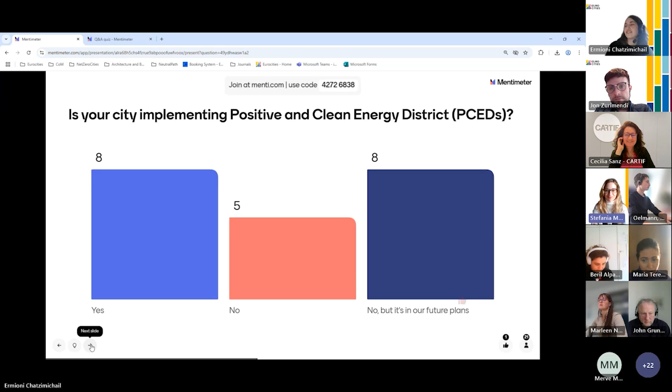And then the next question is, from your perspective, what could be the main challenge of implementing a positive and clean energy district? We know there are many, so just pick one. Yes, funding is a big one. Bureaucracy as well, energy flexibility, climate impact. Quite a few. We will need a follow-up webinar to address all of them, but hopefully we will address some of them today.

Okay, and then the last question for now is, from your perspective, again, what is the main benefit of implementing a positive and clean energy district? Resilience, climate goals, livable lives. Zero emissions, electric vehicles. Local control, yeah, a big one.

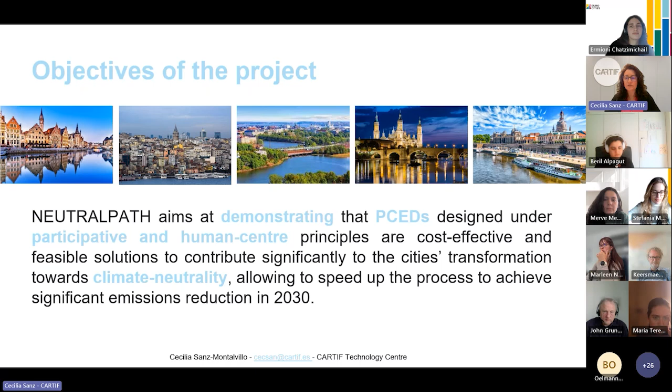We are 25 partners from different countries. These countries obviously are focused on the cities that work in our project. We have two lighthouse cities, Dresden in Germany and Zaragoza in Spain, that implement the interventions in their districts. And we have three fellow cities that work with them, learn with them, and also work on climate neutrality in their own cities: Ghent in Belgium, Istanbul in Turkey, and Vantaa in Finland.

So with this group of partners, we are implementing Neutralpath. We are in the middle of the execution of the project, which started at the beginning of 2023. Apart from the implementation in the cities, with these positive and clean energy districts that help us to understand how different solutions converge into only one,

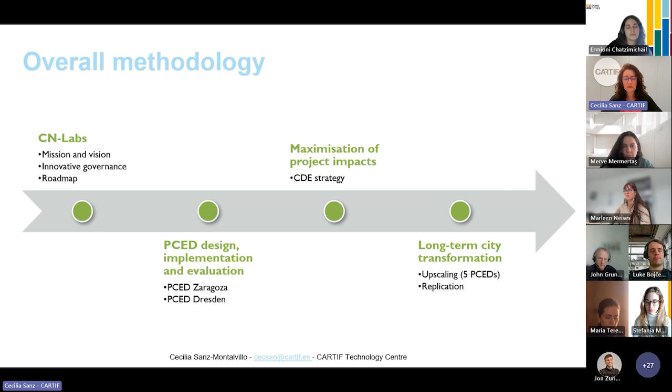we are working on the long-term planning of the cities. We think to transform our cities, and this work is being done with the 5 of our cities. We will measure the impact of these implementations, and also we work closely with the citizens through our climate neutral labs. In these climate neutral labs, we involve all the stakeholders that could be involved in this positive and clean energy district, not only the citizens, also other companies around the city that will help to implement this in the future, working with neutrality in all of our cities.

But before working on it, for those that maybe don't know what a positive and clean energy district is, we have to think of the districts of our cities that implement clean solutions such as energy retrofitting of our buildings, implementing different renewable energy sources there, and sharing the energy between different buildings and storing this energy. We try to reduce the annual demand of this district, being able to provide a surplus.

The intention of all of these solutions is to produce more energy than the district needs. And what we can do with this energy, we can share with other buildings close to the district, or we can put it in the grid for other parts of the city. So with these districts that will be able to produce energy for the rest of the city, we want to help achieve the climate neutrality of the whole city.

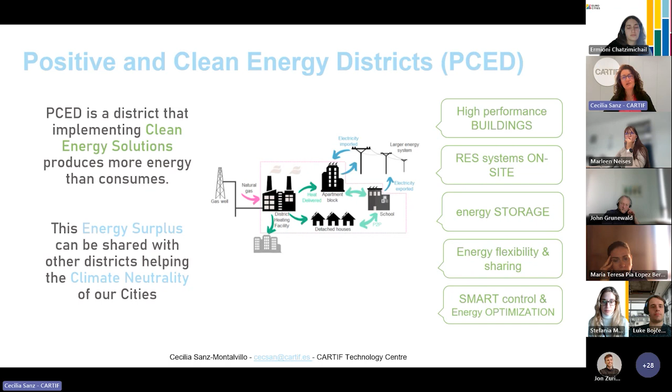So this is the main objective of the positive and clean energy districts, and in fact, the demonstration in this project. We are doing this demonstration in Zaragoza and in Dresden. We have two different configurations of the positive and clean energy district. In Zaragoza, we have a geographical district, all concentrated in the same one. We have public buildings, tertiary buildings, and also residential buildings. This joint of different users allows us to share the energy consumption profiles, and according to the supply and demand, we can produce more energy.

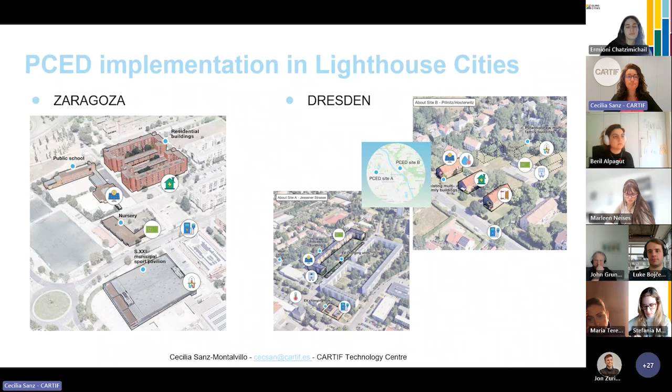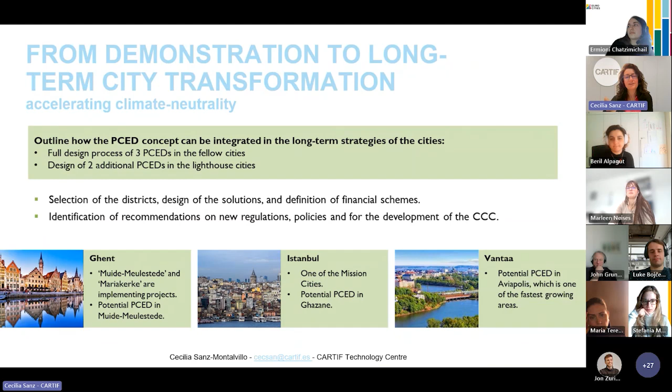In Dresden, which will be explained later by my colleagues from the municipality, we have two parts of the district. We have a virtual path, and there the two parts of the city complement each other and produce energy jointly. Apart from these two cities, we are working very closely with the three fellow cities, which are very active in climate neutrality, and are designing the future positive and clean energy district that could be implemented by them later.

And with all of these considerations and learnings, of course, with the type of project we have, it's important not only that we learn, it's important to provide this knowledge to the rest of the community, to the rest of the cities that could be interested in implementing it in the future, and share the experiences that have been learned here with others. So this is maybe one of the aspects that I'm treating today with this webinar.

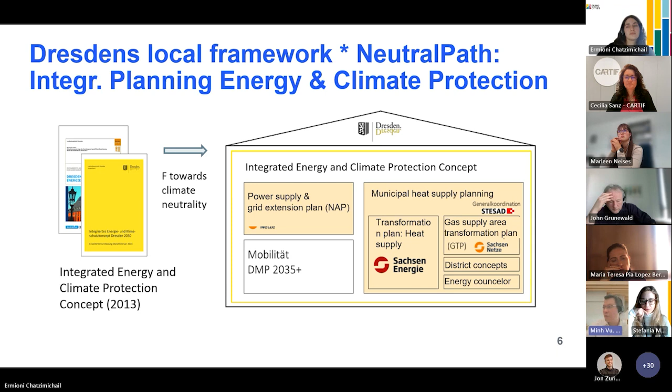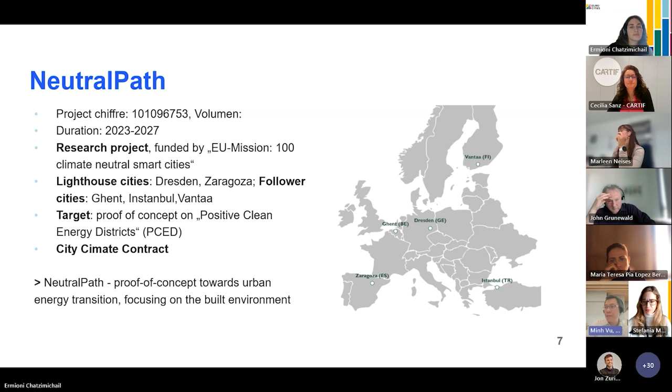And in Dresden, when you look at the next slide, you can see we have 5 work packages here that are oriented towards the main ideas of this mission, which is to have the local citizens involved there and other stakeholders. Therefore 5 climate neutrality labs have been set up in the 5 cities involved here. We want to develop and define innovative governance strategies surrounding that, but also having a co-design approach towards setting up this kind of climate neutral energy district, what we call positive clean energy district.

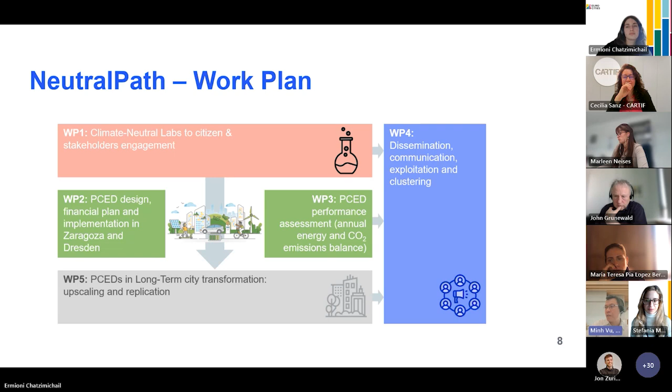And then we want to monitor and assess the performance of this district, as well as disseminate what we are doing right now, our results, as well as developing a long-term perspective for the city transformation. And I think this is one of the main challenges here, to have a long-term perspective developing from these demos.

So in the end, we want to demonstrate that PCEDs are designed under participative and human-centered principles. There should be cost-effective and feasible solutions to contribute to the city's transformation towards climate neutrality, and this should be the basis to approach climate neutrality by 2030.

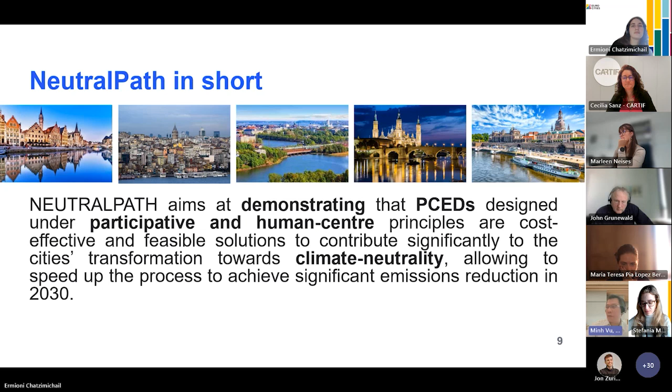Please now go to the next slide, where you can see the demo sites I want to briefly present. At the start we had 2 sites. One is Vonovia, as you can see here, which was called Site A. Then we have Site B, and now we have Site C.

On Site A, we try to, it is a collaboration between SachsenEnergie, Vonovia, and the university, where we develop a more efficient and low temperature level heat supply grid, meaning that we can reduce the energy demand of the grid and contribute therefore to a lower carbon footprint.

And on Site B, it is not connected. There are old houses, one family, maybe multi-family houses, and there we want to have a decentral supply. But here we have now put it on hold because we can't finance the construction expenses of that.

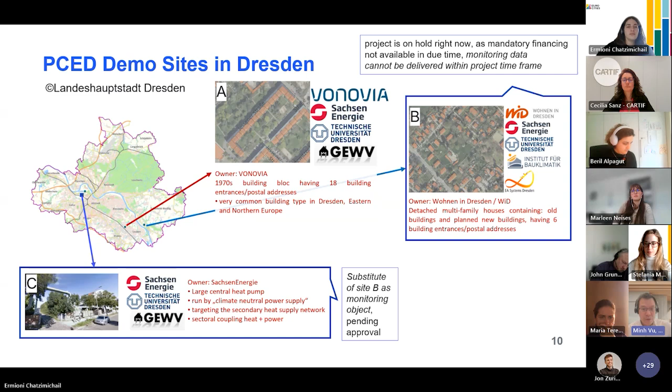But now we think that we can have an energy district, a positive district, when we add Site A and Site C, because the energy output here can generate a higher export than an import. Please go to the next slide.

Maybe to have a short presentation of the sites. So you can see here, Site A is a large building, a residential block from the 70s, and more or less it needs a modernization, and we have seized the chance to modernize the energy system as well.

And what we want to do is permanently reduce the district heat supply temperatures there from 95 degrees Celsius to 70 degrees Celsius, having a low exergy system, meaning that the input temperature level should be reduced, and therefore we can have a higher efficient system. The other stuff is also important, but I think the most important is to reduce the district heating supply temperatures, because then we can add renewables into it.

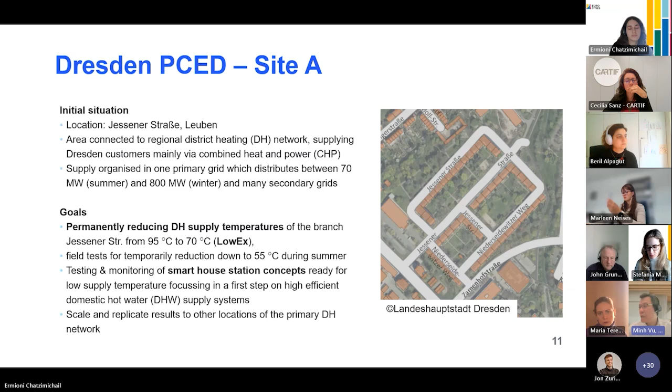So going to Site B on the next slide, you can see here this is more or less a countryside picture, and the buildings are old. This represents a large portion of Dresden's residential areas, and we have to have a decentral energy system, a heat supply system here. We also need retrofitting and also using a lot of ambient temperature technologies like heat pumps, etc., to have a lower carbon footprint.

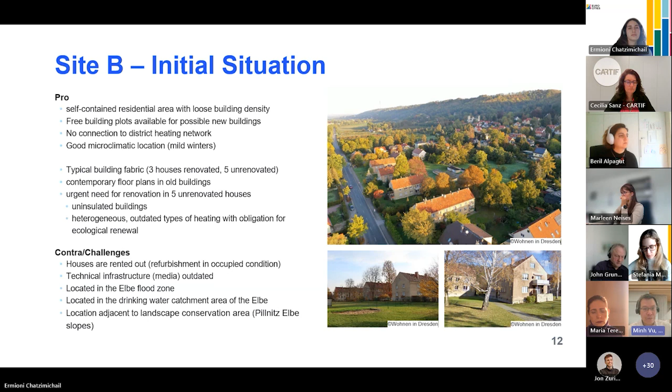And this is something that is more demanding because it's more diverse, and so we need also a more flexible system of financing of those projects. Please go to the next slide.

Here you can see this is our proposal, so it's not approved yet, for Site C. Here you can see it's a large central heat pump that directly feeds its output into the secondary district heating grid there. And also because of this large capacity, we can achieve our positive energy balance. This is something that's ongoing, and we hope that the project controller from the EU can bring forward this solution from our side.

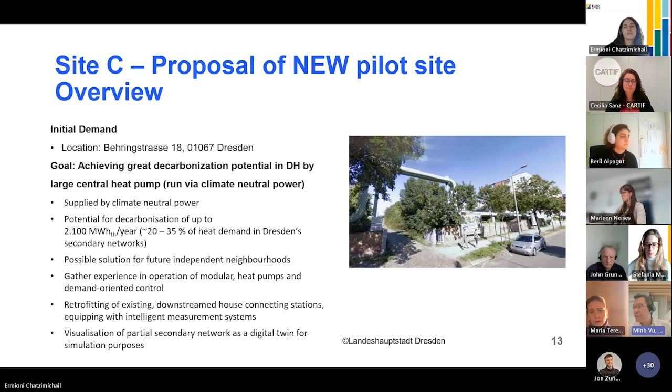So this is a very brief presentation of the sites. Could you please go to the next slide? I have here a very short summary of this. So currently Site A is relatively unchanged, and I think that this kind of low temperature district heating network we can realize there.

Site B we will keep as a dissemination object in the project, because the concept is still viable, but the financing structure is something that has nothing to do with the technical feasibility of the project. And Site C is something that - so if you look at our project, we have 3 sites.

We will summarize, or add, all 3 projects' energy balances into one common balance. And because we don't have one single situation in a city, we have to see what kind of typical solutions we can do on each site. Then we will add all actions into one energy balance. This was the idea from our side.

So right now we add the energy balance of Site A and Site C, whereas Site B is not part of the energy balance for monitoring purposes. But we keep it as a project that should support the discourse in the city on how to move forward with project sites that are not connected to the district heating network. Could you please go to the next slide?

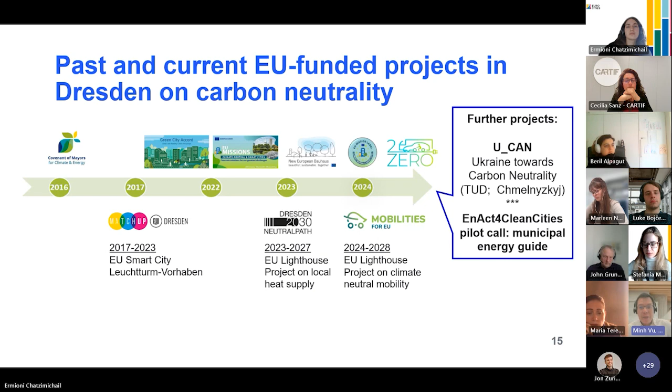Thank you so much, Minh, for the presentation. I know there's already a lot of content shared in these two brief presentations. Hopefully by now our participants have a clearer idea of the Neutralpath project, what it's about, positive and clean energy districts, which cities are involved, which components and sectors we are trying to tackle, and the overall goals of climate neutrality, and how to use positive energy districts as a component for European cities to achieve these climate goals. More specifically, we've heard from Minh the details of how this project contributes to a long-term vision for the cities, and the specific sites of the positive energy district that the city is trying to implement under Neutralpath.

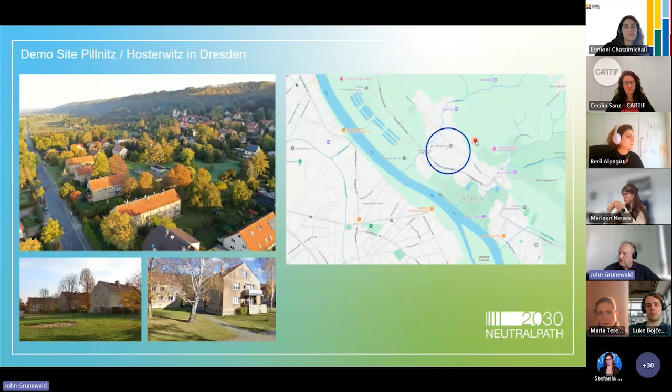So you see here the pictures. We have some free space, and free space square meters of garden give us possibilities to harvest energy. And also the buildings are not very complicated. I think it's quite easy to put some renovation methods forward. We have also the river Elbe, which is very nearby. So we have quite good conditions there, and I think it's an interesting project.

Our targets are, of course, supply of local renewable energy, and also the reduction of emissions, CO2 and biocides. I come to this point later. Then about owners, there should be a renovation of the building without moving the tenants out, which is also relevant to the cost of renovations. And our solutions we propose to renovate buildings are done by available components. So this is not very complicated. It's quite easy to install, but should be very efficient. And this should lead us to energy transition at affordable prices.

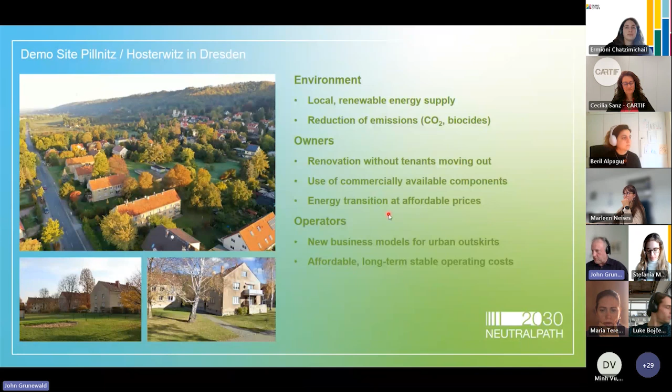At the same time, it should open up new possibilities to develop business models for the energy suppliers, which are specific to this kind of locations. And as Minh Vu already said, this location is kind of typical to Dresden locations. We have 66% of our buildings which are not connected to the district heating network. That means we have situations like this. So it is the majority of buildings in Dresden, and therefore it should be interesting to develop some new business models for energy supply of those locations. And of course, they should be affordable, not too expensive, and there should be a long-term and stable operating cost. This is, in short summary, our targets.

The first thing I like to mention is the method of our work involves digital twins for building performance simulation, which I think is a very important tool to be more accurate in predictions. When we talk about renewable energy, this is not available at every amount. Most of the time it's a limited resource. And when we have to develop plans for using limited resources, we have to be a little bit more accurate in our calculations. This was not the case in the centuries before. In fossil times, we could afford lavishing energy, and I hope this time is over now, and we can come to new planning methodologies and new planning tools which take into account the limitation of our resources.

So that's the reason why we use a building performance simulation to know about the energy demand of the buildings. The first assumption is that we develop geometric models like this, what you see here on top of the screen, so that we have a one-to-one model of the buildings inside our computers, and the building models are able to run simulations on hourly and sub-hourly basis, so that we have a quite accurate physical description of all energy flows and energy processes that go on inside and outside the buildings.

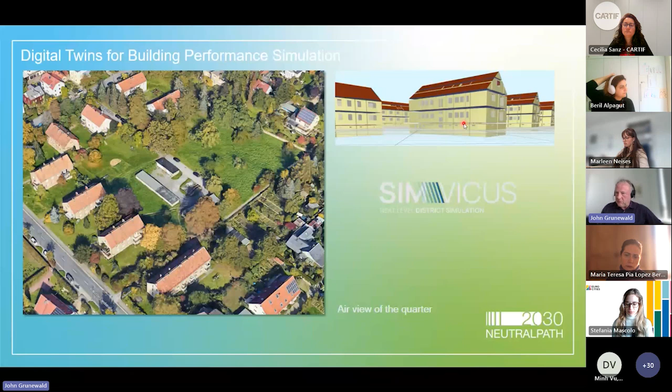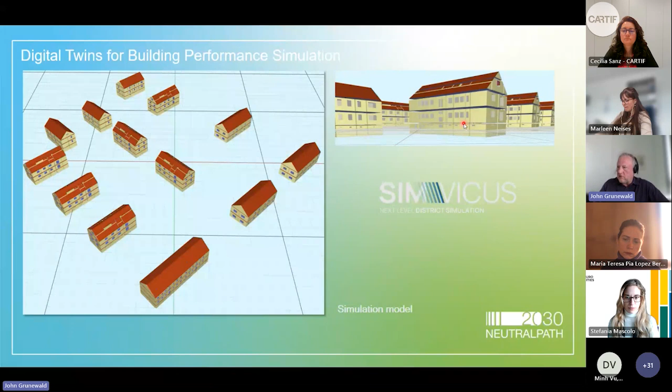So the next step was to take all these technical parameters from the buildings and to develop the digital twins of this quarter, what you see here. And once this is done, you can let it simulate, and you get hundreds of results. For instance, you see here in the top graphic the boundary conditions, temperatures and relative humidities of the location, and then the inside temperatures in the buildings, which are pretty much constant because we have heating in wintertime and maybe some good conditions still in summertime.

Then you see here the radiation loads which are applied to the buildings, and then here some energy balances on a monthly basis, but this is derived from hourly energy balances. And then we know about the predictions of energy demand, and of course we have to compare with the actual energy demand, and we did some monitoring on site and compared simulations and reality.

And then of course there is the first difficulty. Some of these buildings are not used in a usual way. We have some special people in some buildings who use very little energy because they just save energy, which is not normal. But we have to deal with this somehow. We have to calibrate our simulations to some realistic behavior, and therefore the comparison between the real energy demand and the simulation is a good step, but it's not enough. We need to find the right interpretation of this data and a right way to deal with it.

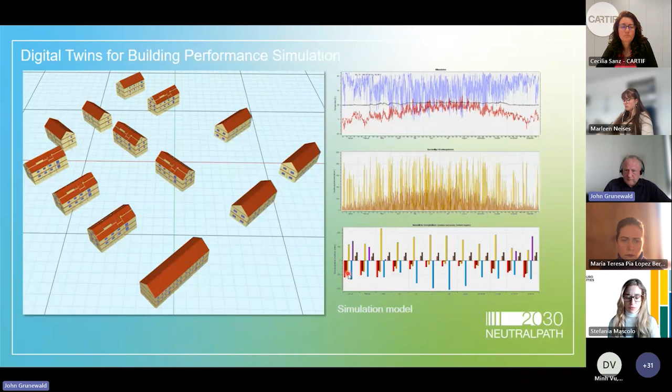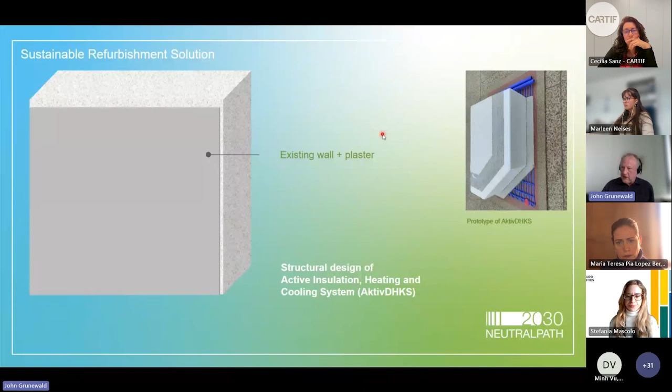So the next step was to develop a sustainable refurbishment solution. And I introduce this solution very briefly. So this is the existing wall with plaster. Fortunately, this is not a heritage protected or listed type of building, so we have the freedom to apply something at the outside of the building. So we come up with a capillary tube system, which is also plastered, so it's installed inside the plaster. And then on top of this, we get a thermal insulation composite system.

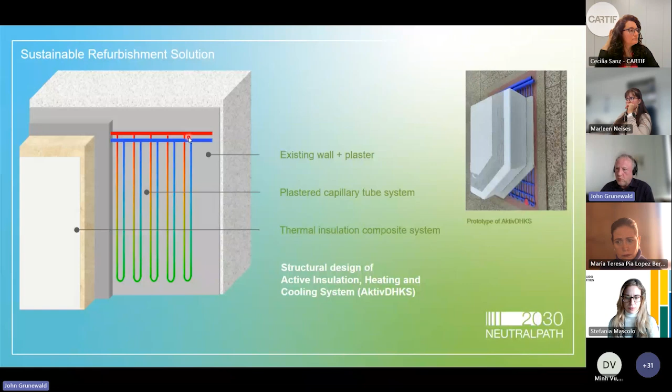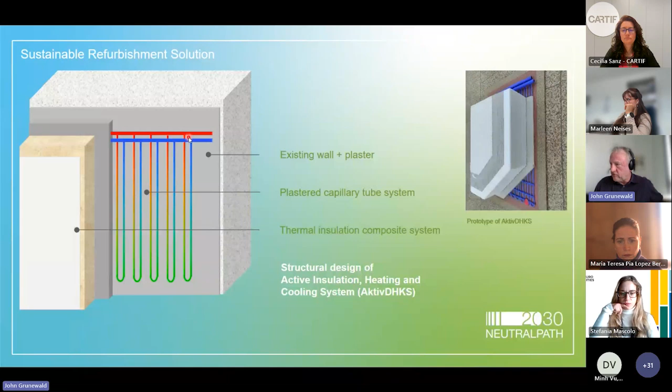And the purpose of this system is to provide a certain temperature at the outside of our wall, which is in wintertime 20 degrees C, and in summertime the same temperature. That means in wintertime we provide some heating of the building from outside. In summertime we provide some cooling. But this is not a full heating load. This is just the base load of heating provided to the building. The peak load is still provided by the radiators, the old heating system, which are installed inside the building. And this is quite interesting. This comes up with some benefits or some advantages.

And the next point is we can activate the building mass, so the building mass becomes a thermal storage. That means we can operate a heat pump even at times when there is no heating demand. We can just store energy and have better flexibility on the electricity side. Of course, we want to have our own electricity production on the roofs, and we want to make use of this electricity as much as possible. And therefore, it's good to have some building mass as a thermal storage.

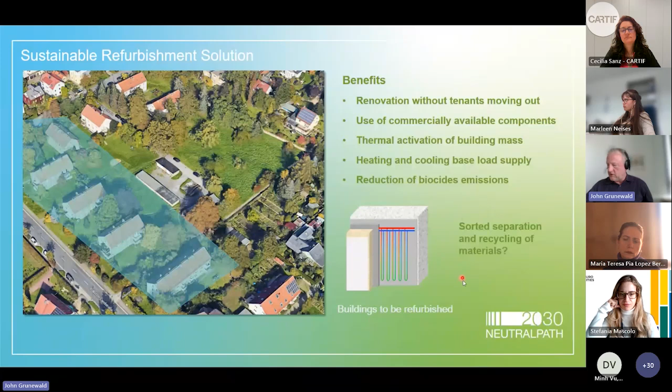So then there is still one question open. How can we separate the materials after the lifetime is over? How can we recycle the materials? We started a new research project on this. So this system is still under development to make it recyclable. And I hope we can come up in maybe 2 or 3 years with a system which can be recycled in a full way, so that we have real sustainable solutions in place.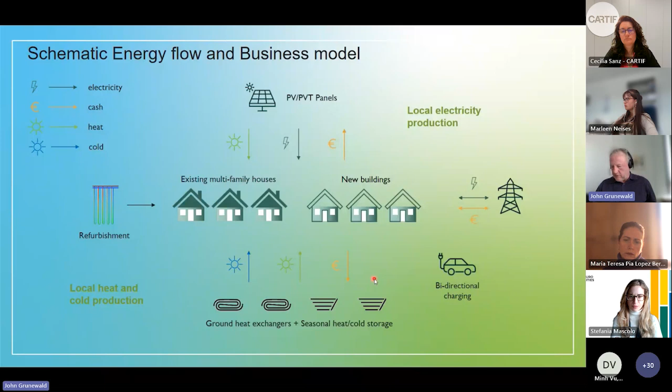And we can also install boreholes. Then we have a vertical installation of ground heat exchangers. And these systems are able to store energy. We can feed in heating energy in summertime and make use of this heating energy in wintertime. So that's a seasonal storage. And vice versa, if we extract heat in wintertime, we build up a cooling potential, and this cooling potential can be taken to summertime and provide some cooling energy in summertime, which is also beneficial.

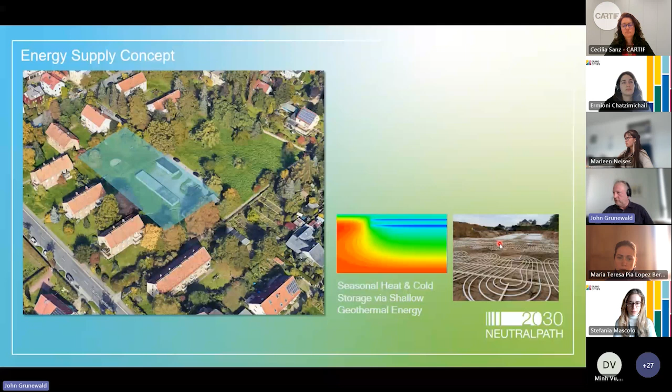You see here the advantages. Of course, this is a full renewable solution. It increases the heat pump efficiency. It provides cooling and storage in one. It's ideal for so-called 5th generation of district heating and cooling networks. This is the newest type of district heating networks. And of course, those networks enable bidirectional energy flows.

And it is space efficient. At least we try to make it space efficient and long-lasting. Those kind of installations should last at least 50 years. And if in place, it can provide energy independence and cost savings, hopefully, and reduce the dependency on external resources.

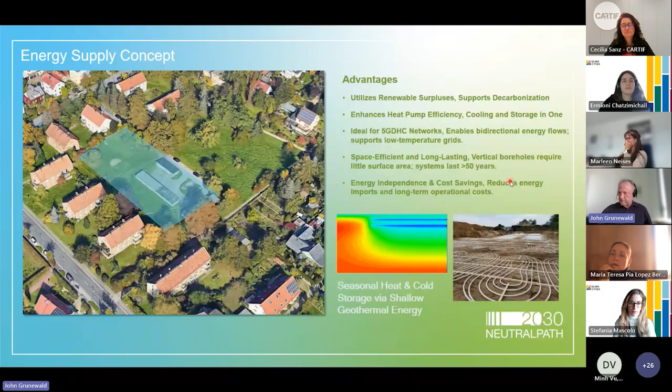You see here a little bit more in detail different types of ground heat exchangers. We call it the first type, which is in the first 10 meters of our ground. This is called the very shallow geothermal energy or ground heat exchangers. Then the shallow geothermal energy is up to 100, maybe 400 meters. And everything that goes deeper than 400 meters is called deep geothermal energy. Deep geothermal energy is not in our interest. In our interest is shallow and very shallow geothermal energy.

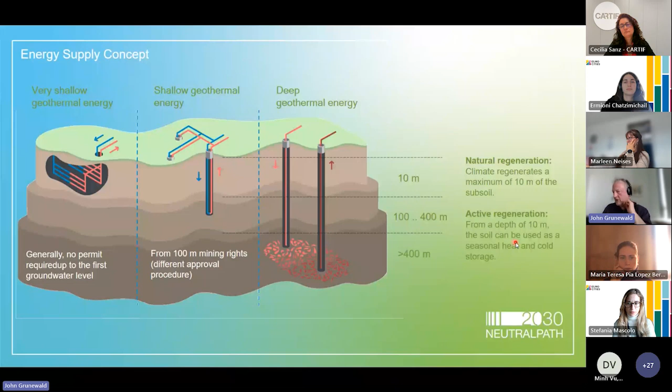And we need to know that the natural regeneration of our ground is possible to a depth of maximum 10 meters. From 10 meters on to maybe 100 meters, there is no natural regeneration from the top of the ground. That means if we get heat from this volume, there is some active regeneration needed. That means we have to feed in heat in summertime to regenerate the ground. Otherwise, we get into problems after a certain couple of years. And this leads us to the seasonal storage of heat and cold.

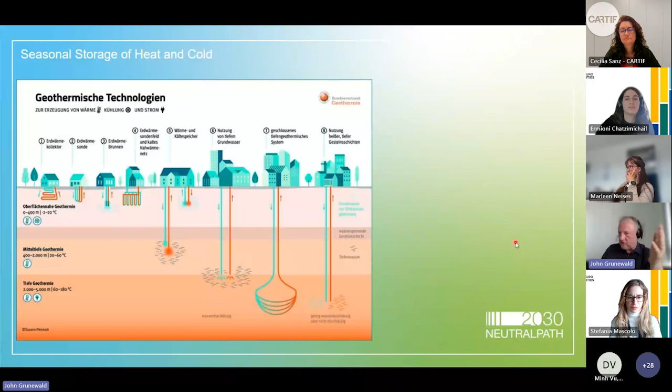So I investigated this topic in detail because this is my favorite research topic right now. And this is something that can be multiplied in different climate zones, but it should be climate zones where we have a heating demand in wintertime and cooling demand in summertime. Then it makes sense to talk about seasonal storage.

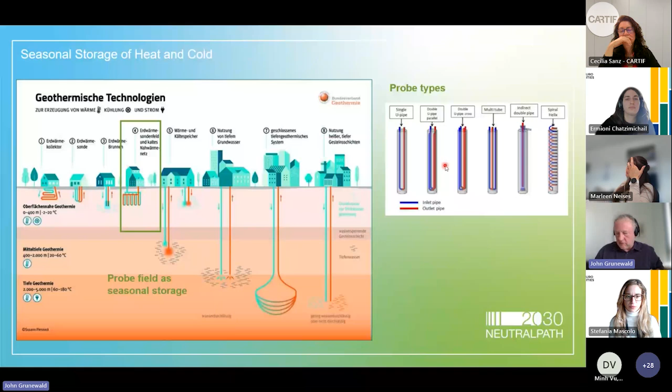And my favorite technology is this kind of probes. You see different types of probes, and those probes are installed most of the time in fields, let's say, in certain distances. It looks like this. You see here a probe field.

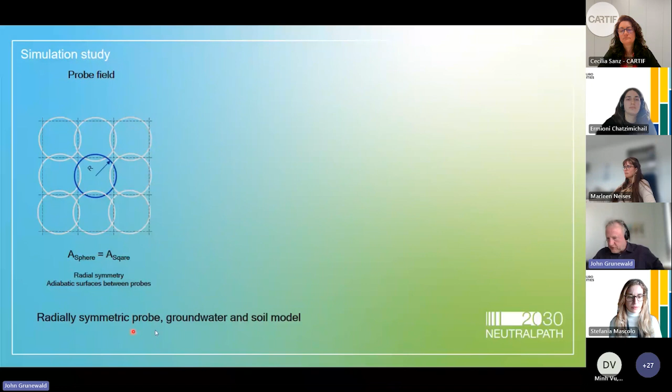I did some systematic simulation of this kind of probes, a simulation study of radially symmetric probes or models, including groundwater and soil models. You see here how it's modeled. There's a rotation axis and there's the heat flow around the probe. I just take out one of the probes from the whole field and put this into a simulation model. And then you see here the simulation model itself.

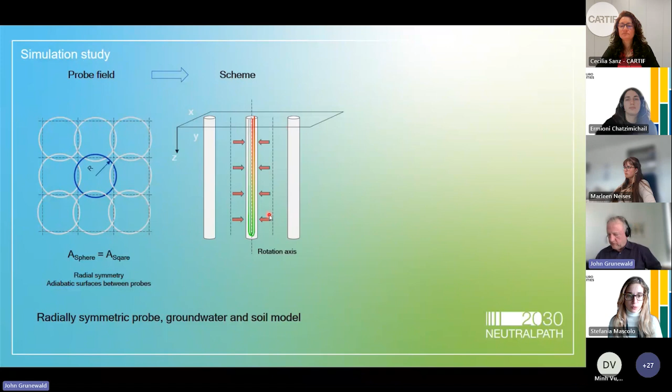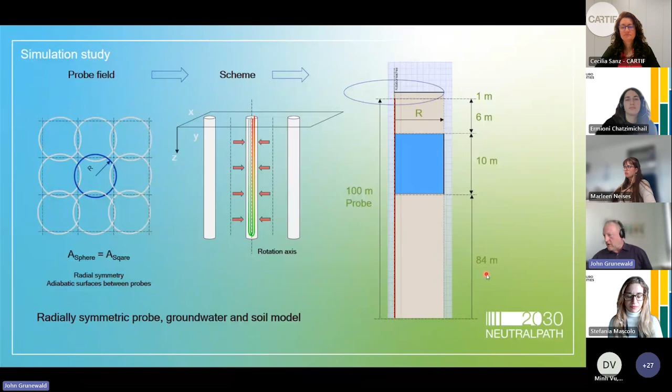We have 7 meters of soil, then 10 meters of groundwater, then 84 meters of underground. In total, the length of this probe is 100 meters. And you see here the model. What we get from the model is the temperature and moisture behavior of the ground in dependence on the extraction and the exchange of energy between the buildings and the ground.

You see here a temperature field at a certain time point. When I analyze my results, I watch this like a movie, because at every hour we get such a picture, and when we follow hour by hour or day by day the development of temperatures and ice contents, we can watch what's going on underground. For instance, here we have some ice content. You see this deep blue. This is already ice formation.

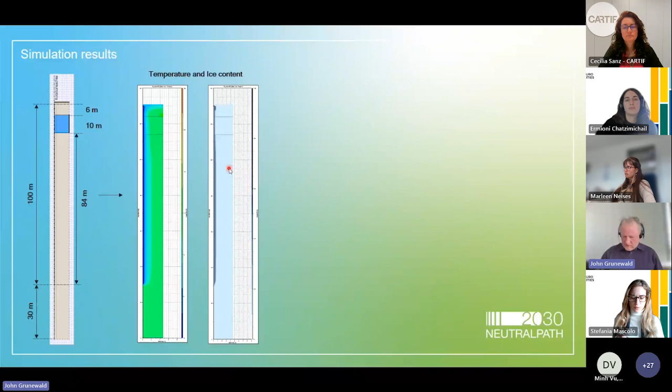This is something new, that we use this also in a way that we have some ice formation. Partly it's not allowed, so we have to discuss with authorities about permission to do this. At least it discovers huge energy potentials, because phase change enthalpy is a huge energy.

And to get more into details, we put some sensors inside this volume. Here in this case, we have temperatures in a 1 meter radius around the probe. The red one is the probe temperature itself, so this is here, this blue area. And then we have the soil temperatures, the groundwater temperatures, and the underground temperature in 1 meter radius. And you see here a natural behavior that happens when you operate such a system.

Of course, in wintertime, we go down to certain temperatures. Here in this case, we have freezing. We go down to -6. In summertime, we go up to about 25 to fully regenerate the ground. Here we have 100% regeneration. That means the same amount of energy that we get in wintertime, we give back in summertime to the ground. So 100% regeneration.

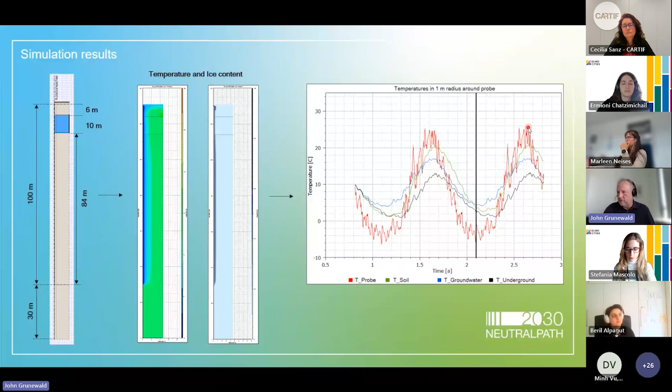This ensures that we arrive at the same point every year, that we have full regeneration and stable operation of the system throughout many years, as long as we want. And I did a systematic investigation of this. The distance of the boreholes was minimum 2.5 meters, maximum 12 meters. Different types of soil: dry, moist, wet. Different energy yields from 3,000 to 30,000 kilowatt hours per year. One probe, and 100% regeneration.

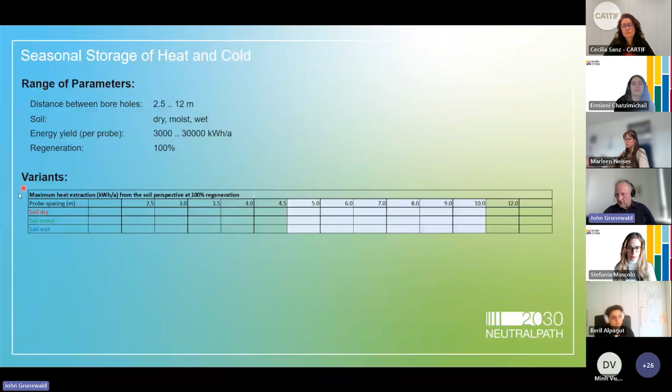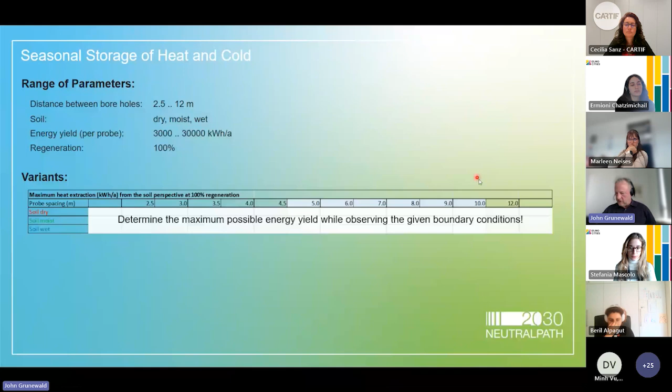You see here the matrix of variants. And then the task was to determine the maximum possible energy yield while observing given boundary conditions. We have different boundary conditions that come from our regulations. The reference respects all boundary conditions we have right now. That means no ice, no freezing, and no overloading. That means we operate the system at an average storage temperature of 10 degrees C.

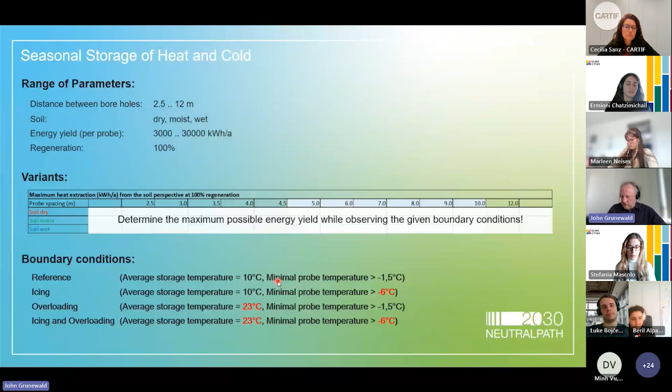Then in simulation, we can ask what happens when we do icing. That means we go down to -6 degrees C in wintertime. That is the minimum temperature. Then we do some overloading. We go up to 23 degrees on average in summertime. And then we combine icing and overloading and look at what's coming out, how much more potential we can access, and how we can increase the energy yield when we allow these kinds of boundary conditions.

And when we go from one location in the city to another, of course, we have to ask how much space is available to install such technologies. Most of the time, space is very limited. Therefore, we have to try to minimize the space requirements. And therefore, the question was, if we go to very small spaces, what about the energy yield?

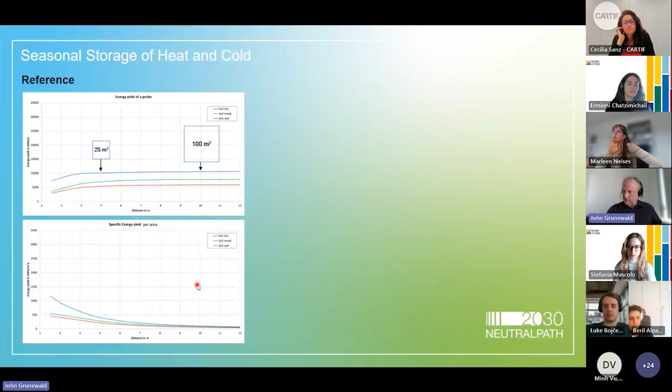And when we even go to icing and overloading, we see the energy yield is a factor of 3. So that's a huge potential, which is not used up to now. And that means our ground can serve us much more as an energy storage than we use it up to now. So there's a huge potential.

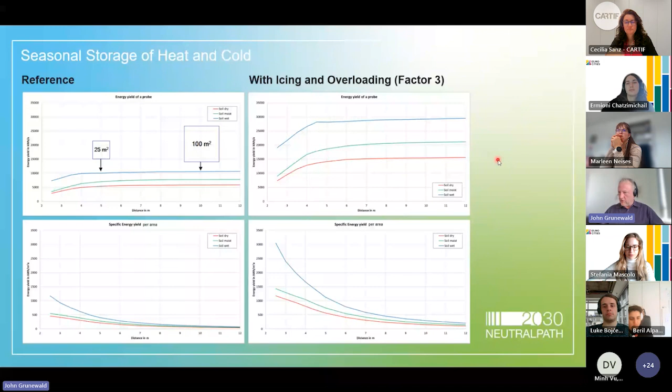And from our point of view, this is the only solution that can provide us a local heating and cooling supply without using burning processes like burning gas or burning hydrogen, and this is, for instance, a solution that can provide some independent energy supply in our cities. And therefore, also from an economic point of view, this should be quite interesting.

So my conclusions: seasonal heat storage through near-surface geothermal, shallow geothermal energy, holds a great, still unused potential. This makes a difference in local renewable energy concepts for neighborhoods. This is what we try to discover. Building renovation and energy supply concepts must go hand in hand. This is also a new approach because buildings and energy supply systems form one system. And when we treat it as one system, we can optimize this as one system.

So building renovation should decrease energy demand, and the remaining energy demand must be delivered by local renewable resources. Cost-effective renovation is crucial for increasing the renovation rates, and the buildings become active players in energy management. And of course, as I said in the beginning of my presentation, high-quality tools and simulation models are essential and should become part of future planning processes.

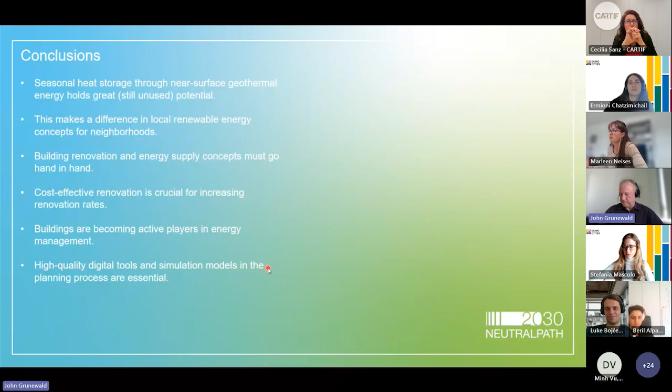Thank you so much, John, for the detailed presentation. I think it will be also very interesting to hear during the Q&A how the participants in the session today relate to these solutions, if from other cities they have any experience in implementing similar solutions or the same ones. And we can also explore together any question that you might have for our speakers later.

In your presentation, John, you have also mentioned how these technical solutions, the energy and built environment sectors, are at the core of the successful implementation of the districts. But we do also have solutions that need to be designed taking into consideration the behavior of the tenants and the homeowners. And this was also a point that you mentioned.

And this really leads us to the next presentation that will be given by City Manager Luke Bojčev from the city of Dresden. And in this presentation, we are going to explore how these technical solutions must be designed, and within NeutralPath are trying to be designed, to really engage with the local stakeholders and the local ecosystem. So the word to you, Luke.

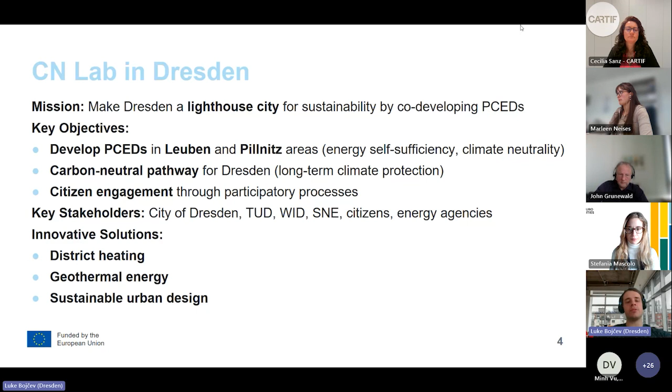So, enough of the theoretical framework, which is, from my point of view, very important. But now I'd like to show you what we're actually doing. We've divided the CN Lab into four stages, or subtopics. The first is management of the lab, then developing PCEDs, then capacities for PCEDs, and last but not least, engagement and societal acceptance.

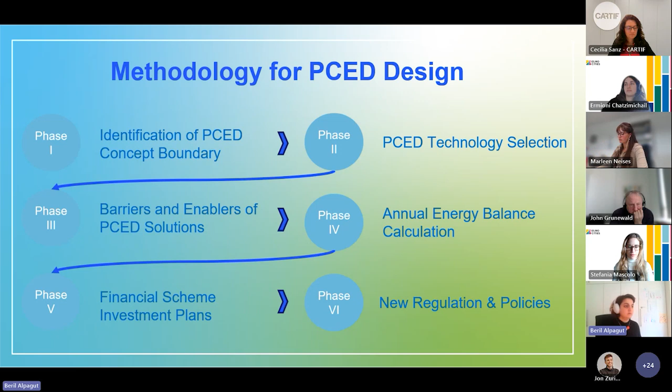The next phase is the calculation of the annual energy balance, to understand and verify if we are really achieving positive surplus energy in the identified district with the identified technology. The next phase accompanies this technology selection with a proper financial scheme and develops an investment plan for the PCED design. The last phase is, if possible, to develop proposals for new regulation policies to include PCED in the zoning plans or strategic plans of the municipality.

As I said, the first phase is the identification of the PCED concept boundary. We start working at macro scale for this identification at the city scale, so macro zones and island scale. We collect GIS-based data from the cities based on identified critical PCED development elements, and I will provide more information soon. Then we evaluate each layer, each category, and each critical element in terms of economic, social, political, and environmental point of view, a kind of multi-criteria decision analysis through a survey questionnaire that we developed.

Once all the critical elements are evaluated through the MCDA approach, we start working at micro scale. We identify potential areas at macro scale, then prioritize one of them to further go on at micro scale. We also overlay the analysis with the energy demand analysis of the district to identify the area.

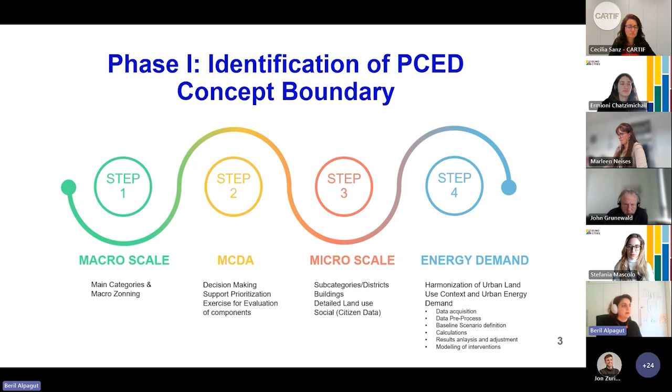At macro scale, these are the categories for the critical elements for PCED development in the city. We collect data based on resource availability in the city - the resources may be solar, wind efficient zones, potential zones, ground coupling potential, as Professor John presented, geothermal potential, water resources, biomass, waste heat, etc.

We also look for opportunities for PCED development in the urban macroform data, such as strategies of the city in terms of new development areas, retrofitting areas, infill or transformation areas. Land use context is also very important for PED and PCED development. Then the energy infrastructure of the city is quite important - if any district heating exists, or any large-scale thermal or electric energy storage available, and e-mobility infrastructure is also quite important for our analysis.

Then we also look for the virtual infrastructure of the city in terms of energy services, so if any virtual power plants or microgrid applications are already ongoing in the city, we look for GIS-based data for these services. And also we look for the social structure of the city, in terms of spatial information - demographic data, and cooperation, if any energy community exists in the city, etc.

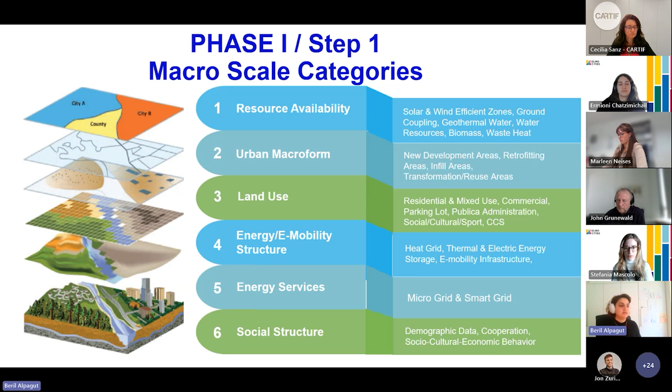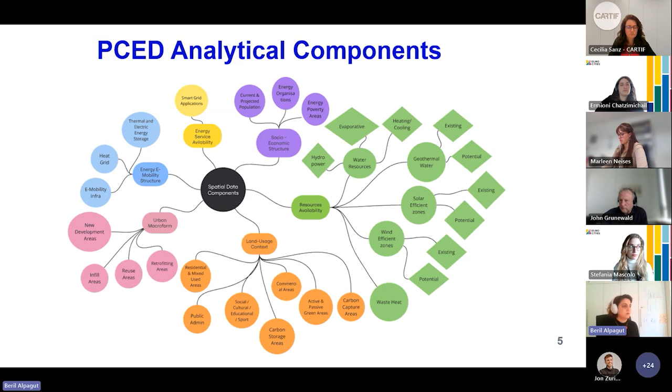So the main 6 categories are listed here, and their subcategories are also listed in a big list. These are called PCED critical elements, analytical components, so to speak, that we start working at the macro scale. As I explained, in the second step of the first phase for area identification, we evaluate each of these critical elements in terms of economic, social, technical, environmental, and legal points of view.

So we direct some questions to the city based on the information they provided us in terms of shape files, in terms of GIS data. And after the evaluation, we conduct a weighted overlay analysis with the results that we collect from the MCDA questionnaire.

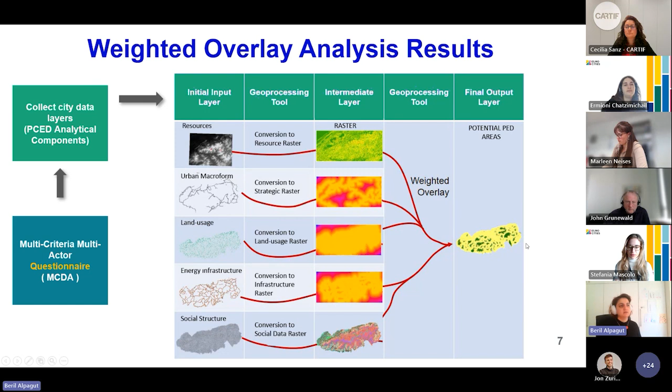So this is more or less the technical approach for the weighted overlay analysis, where we generate rasters and conduct the raster calculation based on the data, and then we conduct weighted overlay analysis with the weights we collect from the MCDA questionnaire. At the end, as you see here, we identify some potential PCED areas in the city at macro scale.

Here you may see some examples from other projects. For example, in Making City, already finished last year, we conducted the same approach in terms of PED development. In Neutralpath, we are targeting the clean concept, as you know, so we changed some parameters, some critical elements as well.

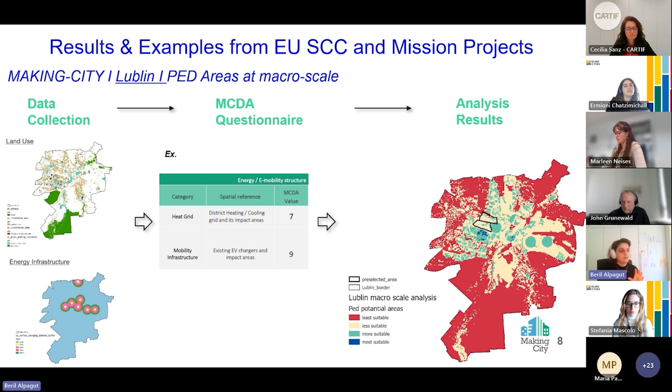As I explained before, we first start with data collection for each category, for each critical element, and then we go through the MCDA questionnaire. The analysis results provide us a map with spatial information showing the least suitable and most suitable PCED areas.

And then after the analysis at macro scale is conducted, we go on with the micro scale. We go deeper with building features, let's say - building ownership, building use data, also the population, etc., of the buildings in the potential areas. And we overlay it with the energy demand analysis we conduct in order to have a rough estimation of the energy demand of the buildings.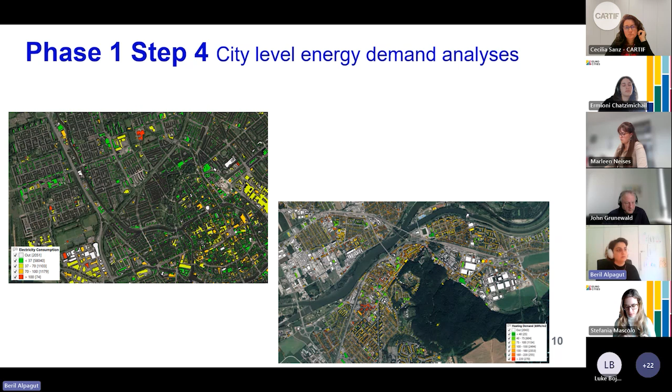So we understand, for example, in retrofitting areas, we see more or less energy consumption of buildings when compared to, for example, new development areas, etc. And this gives us a clue on the city's approach - if they are willing to work to develop a PCED in less developed or more developed buildings.

So again, you see some other examples from Making City here, in the city, with the overlaying of the energy demand analysis and the potential areas. We identified prioritized areas in the city to work on at the macro scale.

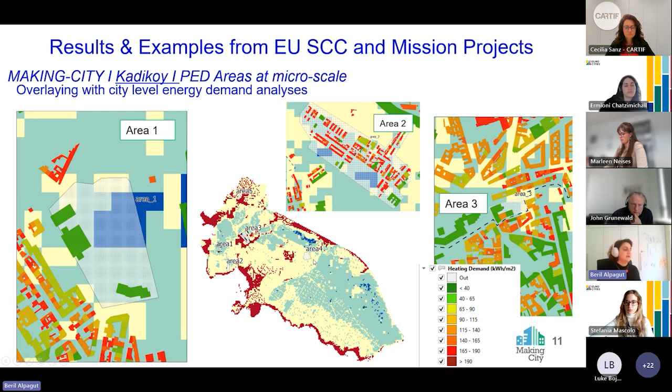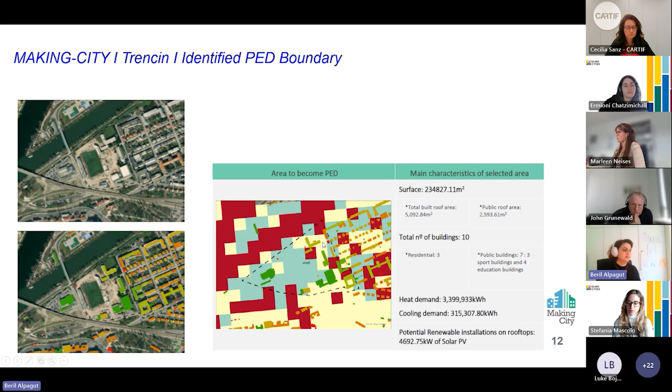For example, this is another example from Making City, our city Trencin. As you see, the identified area - we provide some information regarding the energy consumption, demand, and also other building users, etc. And that's the identified PCED boundary here.

So then we go on - when we identify the area for PCED development, we go on with the technology selections. Here again, we identified another methodology to identify the technologies. First, we try to define the ambition level of the district - if we aim for climate neutrality, let's say, or if we just aim for positive energy balance, etc.

And then we developed a tool that links you to technology packages based on your ambition level, based on your answers to the questionnaire that I'm going to show you later. And then we prioritize some technologies based on the answers of the district, based on the ambition of the district, let's say.

And then, as I said, we conduct a barrier and enabler analysis for each technology, and we conduct the calculation of the annual energy balance. The barrier and enabler analysis represents phase 3, and the calculation of the annual energy balance represents phase 4 of our design methodology - to understand if we are really positive or not.

So this is the tool that we developed in Making City, first of all, for the positive energy district technology selections. But here in Neutralpath, we're going to adapt it to PCED development, which means that we will also consider climate neutrality in the technology selections.

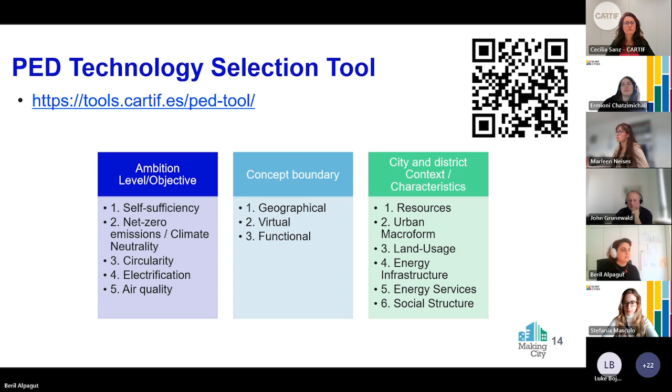And then it asks you questions, just yes or no questions on the resource availability, urban macroform, land usage, energy infrastructure, virtual energy infrastructure, and social structure, all the same categories that we developed for identifying the PCED area. And based on your answers, it provides you a technology package as a result, more or less something like this.

But here, lots of technologies have been selected based on the answers, just to provide you a quick view in a nutshell. Once the tool provides you these images on the technology packages, you understand what kind of retrofitting you should be conducting to your buildings, what kind of technologies you should use, for example solar generation, wind generation, or biomass, whatever, and also if storage should be integrated or not, or if e-mobility is also available in your case, etc.

But as I said, we're going to adapt this tool to Neutralpath very soon. We are now with the cities at the stage of data collection and filling out the MCDA questionnaire with the Neutralpath cities, with Dresden, for example. The next level, towards the end of this year, will be to identify the technologies.

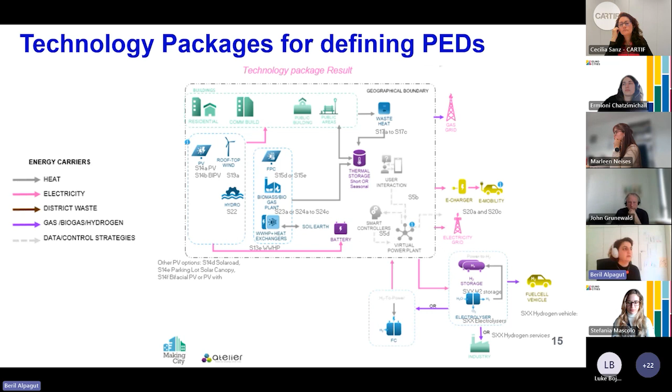And for the calculation, once technologies are set for the district, then we can start calculating to understand if we are really positive or not. For this, again, we developed another methodology. First, we define the PCED boundary, which is, in our case, mostly geographical, but sometimes also virtual boundaries.

Then we calculate the energy needs of the district, the energy use, the so-called energy consumption, the on-site renewable energy generation, and the estimation of the energy delivered, so how much energy is delivered to the boundary from the grid or from the heat grid, etc. And then all the calculations are converted to primary energy to speak the same language with thermal and electric, as you may know. And then we calculate the balance, so we see if we are really positive or not.

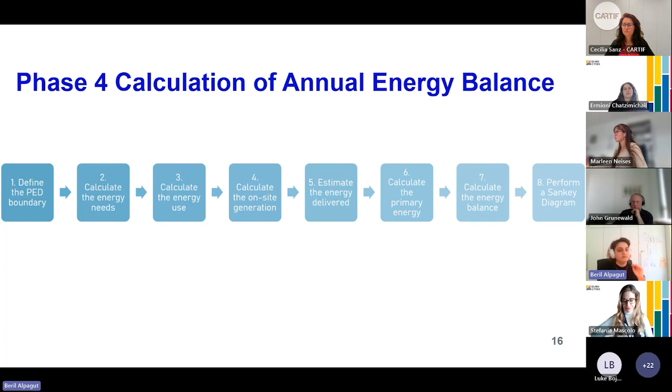And as I explained at the beginning, we will also develop financial schemes and investment plans for the identified PCED technical designs. For Dresden, we will calculate the cost and the revenue data for each technology identified in the potential PCED development. And we're also going to list the non-monetary benefits, because these are also quite important to be included in the investment plan to motivate the investors for the PCED development, and matching these benefits and costs with the appropriate financial instruments will be conducted.

Maybe a kind of decision support tool can be developed to help the cities, not just the fellow cities, but also, of course, the lighthouse cities to design their PCED. And the last phase, as an outcome of all of this research for identifying the PCED area, technology selection, and development of investment plans and financial schemes, will result in recommendations for replication and scaling as new policies for the city that could be included in midterm strategies, long-term strategies, and also climate neutrality strategies for the city, hopefully.